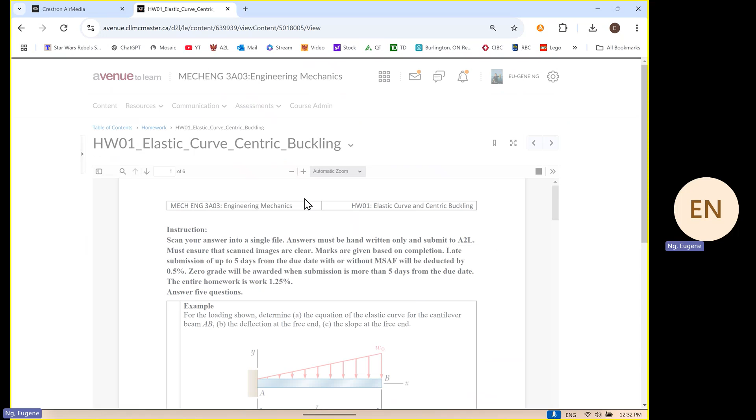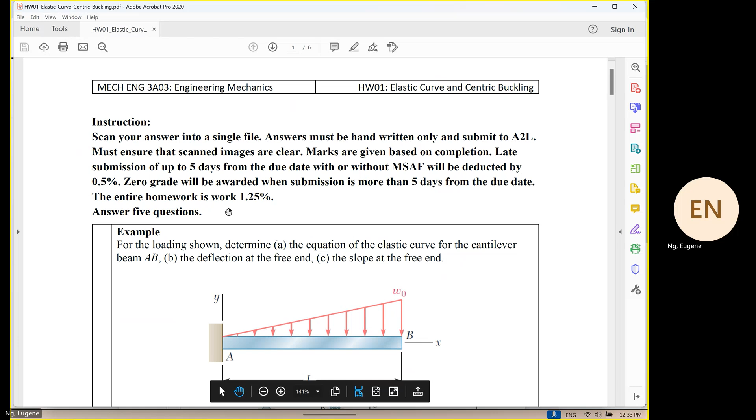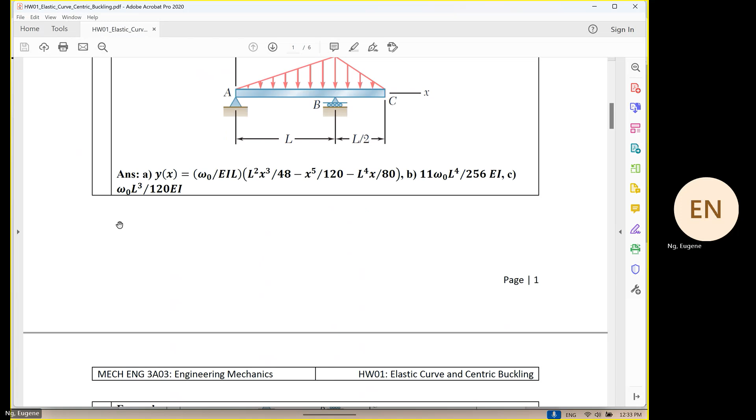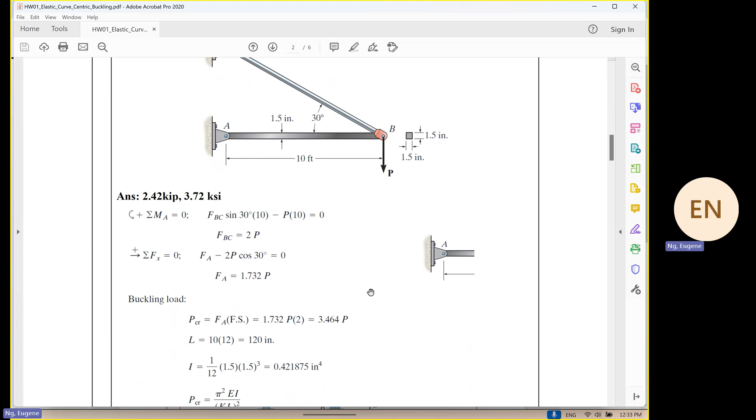So this is your homework that you see. For all my homework, you have to answer 5 questions. This is a bad example over here. Anything that you see a number over here, you have to do. And what I've done this year, over here, this is a different question, but I put it as what? Example. Are we clear? So the example means this is the question, and the solution is also provided already. This you also do, but you don't need to hand it in.

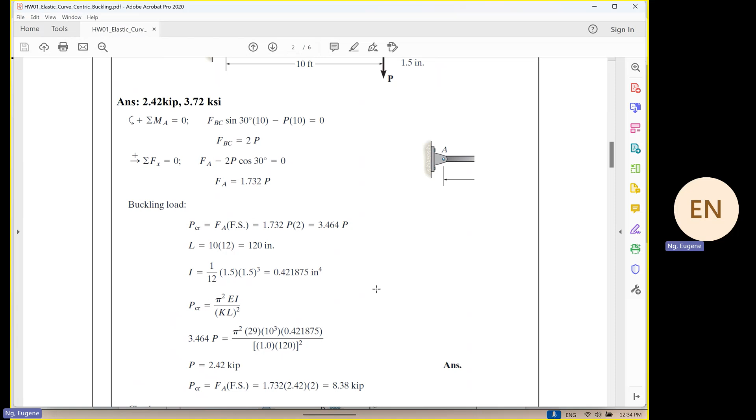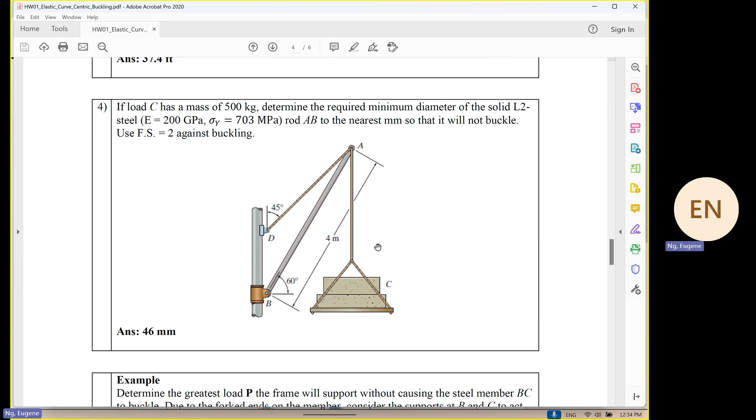What? Confidence. Yeah, I want to give you some confidence. The solution is provided. So for this question, you do it on your own. If you don't hand it in, I'm fine. For the next one, you see question 2, solution not provided, but the final answer is provided. Question number 3, question number 4. Then you see the next question is again what? Example, the solution is provided. But that does not mean that... No.

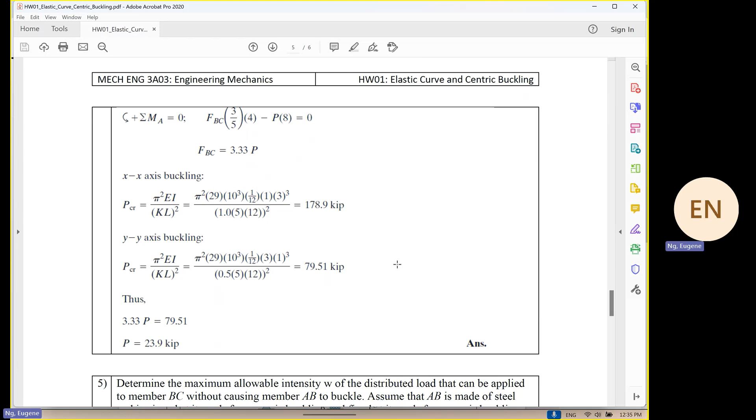These examples can be the question. The only thing is you don't need to work them and hand them in. Are we clear? Because in the last course evaluation that I got, not enough examples. So I'm giving you all more examples now. So only do those questions that have what? That have a number on the side over here. Are we clear? Only do those questions that have a number. More exposure, more questions.

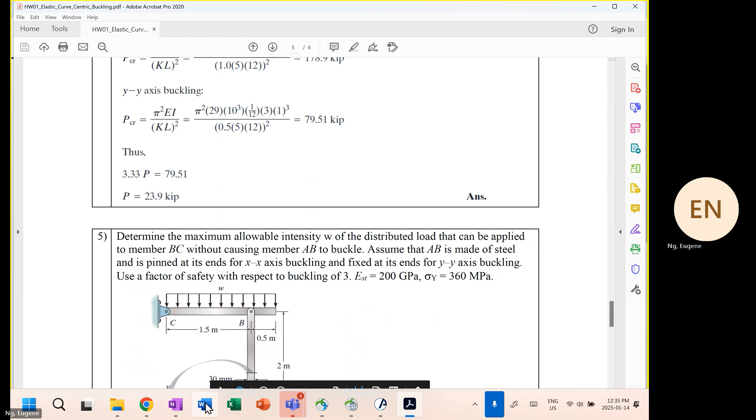The due date. I usually give a week; it is due on January 20th. And you can hand in up to 5 days late, say, on your MSAF. Okay, you're wasting your time on MSAF. You can hand in up to 5 days later, but half the marks will go. Are we clear? Same as 2Q04. Now, 5 questions is not a lot. Am I right or am I wrong? It's not a lot. Try to finish them. Be ahead of time.

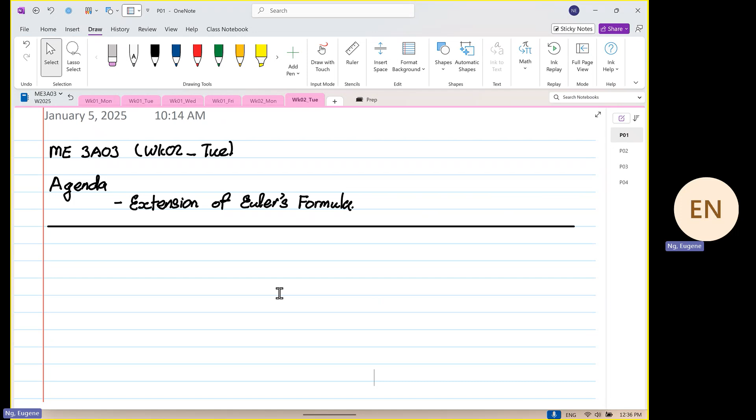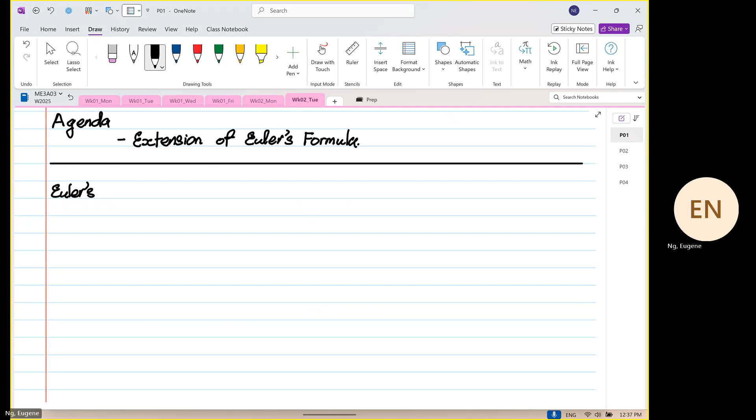All right. Before I go on, please go into week 2. Download the examples that I'm going to do, because all the images and questions are going to be taken from there. So today we are going to focus on the extension of Euler's formula. Based on Euler's formula for buckling, there are 2 formulas that you have seen before.

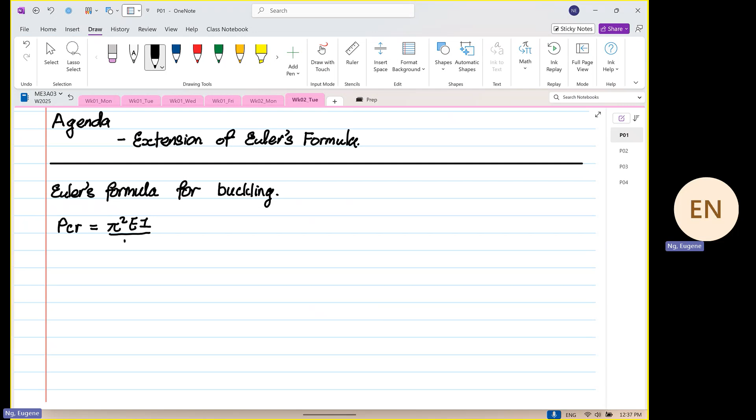One is based on the critical load, which is equal to pi squared EI over L squared. And the other one is based on critical stress, which is the critical load divided by cross-sectional area. This eventually becomes pi squared EI over A L squared. There's an L squared missing on my term over here, I do apologize. And when we write this out, it can also be pi squared E over (L over r) squared. As you already know, L over r is known as the slenderness ratio.

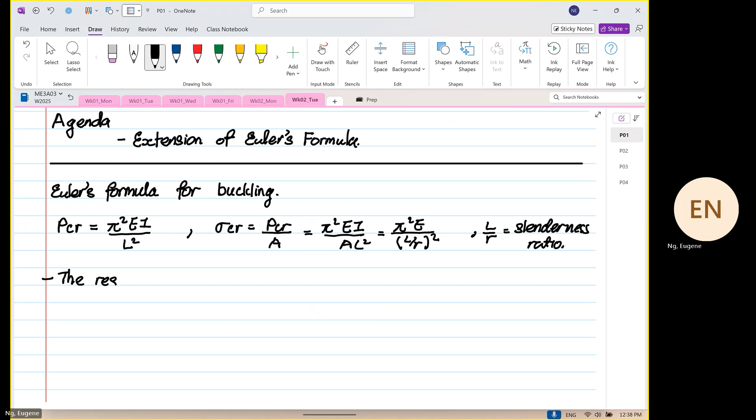Now, also known is that the resistance to buckling is dependent on Young's modulus, as you can see, this is our E. It's dependent on the length, this is our L. It's also dependent on our cross-sectional area or cross-sectional geometry, which will affect both our I and cross-sectional area, and also how the structure is held on its ends.

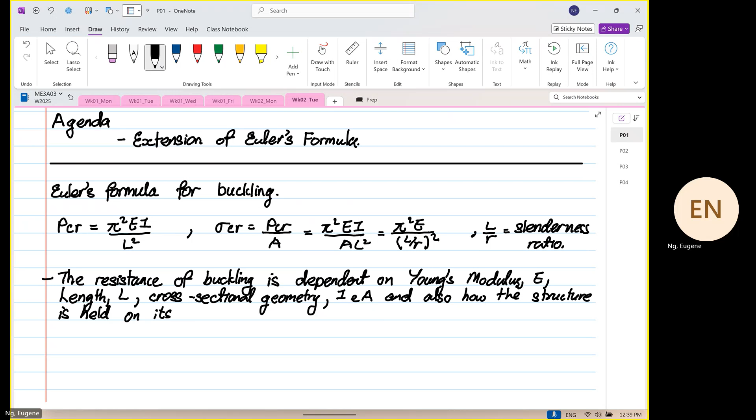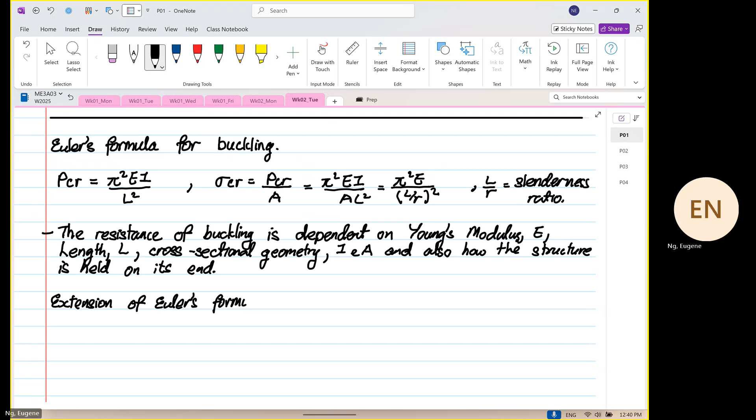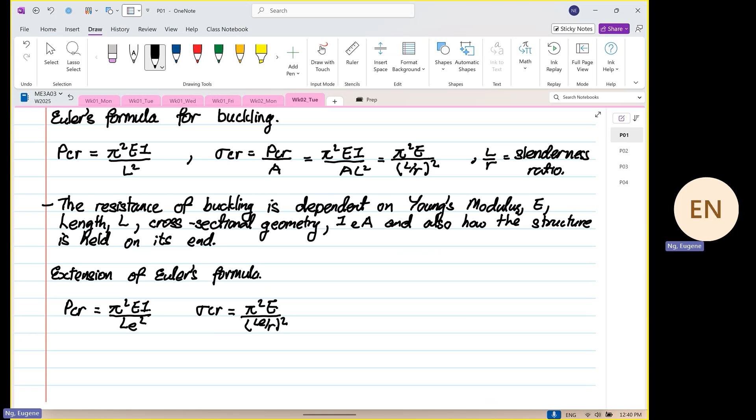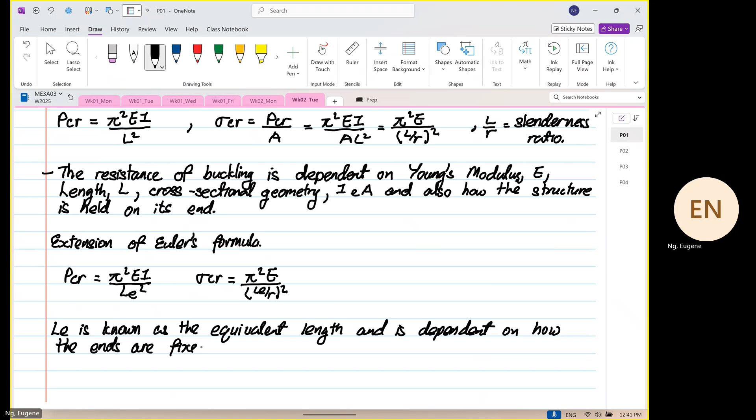So to write this out based on the extension of Euler's formula, you write P_cr is equal to pi squared EI over Le squared, and the stress is equal to pi squared E over (Le over r) squared, where Le is known as the equivalent length, and is dependent on how the ends are fixed or held. If I say fixed, it's pretty contradicting.

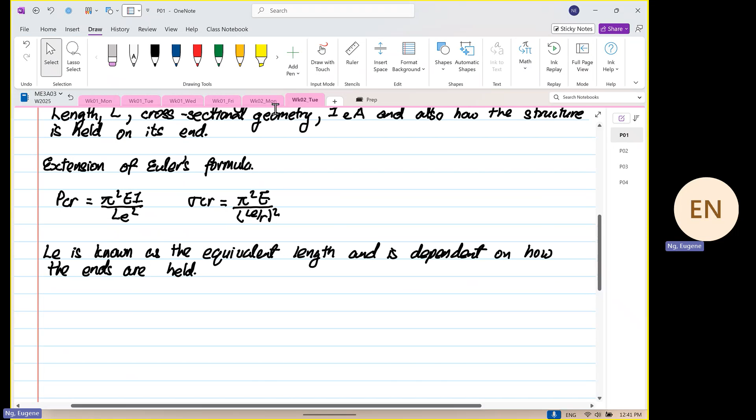So based on yesterday's notes, we have this image, okay? I want you to pick this image out. If you have this image, download this image as soon as possible.

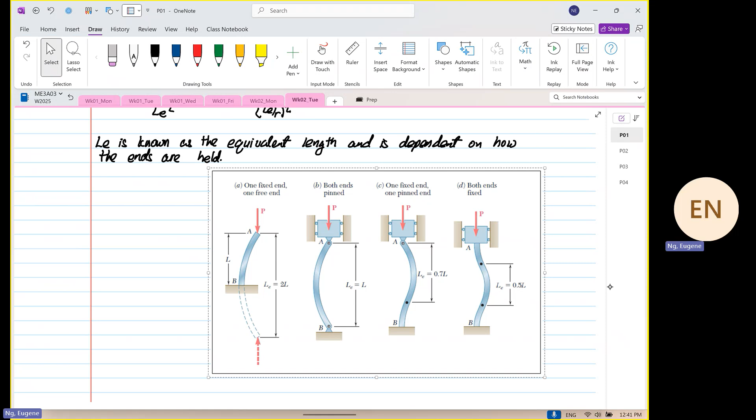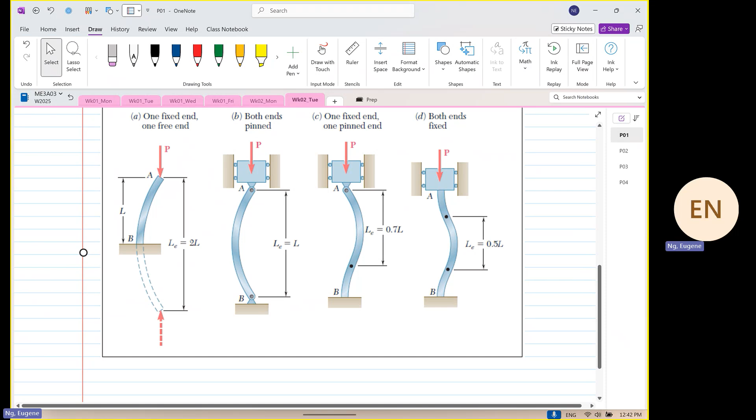Now, these images, initially, when you look at them, it's pretty confusing. Okay? Initially, when I look at them, I find it a bit confusing also, okay? So the most important thing to observe is the deformation pattern. Okay, observe the deformation pattern.

When I look at them, you know, you have this mode, it's like, see nothing. Okay, that was me. Okay, but don't be like me. Okay, I just like, okay, it's a diagram, move on.

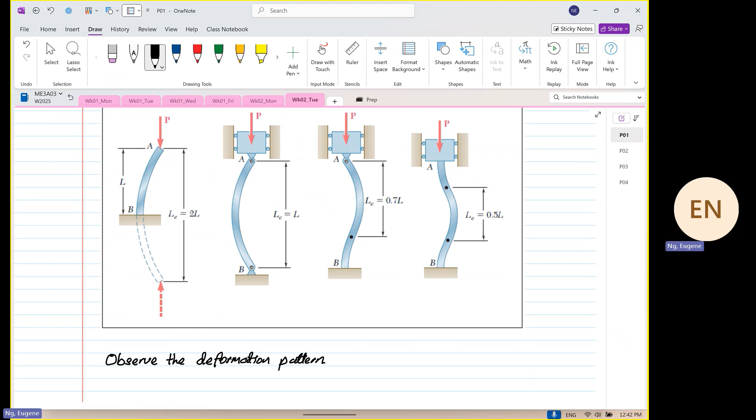Okay, the deformation pattern is as critical over here as anything else. Okay, so the first one is one end is fixed and the other end is free. Okay, so you can see, right, this is how the deformation pattern looks like. So when it's fixed, what you can observe is over here is more like zero bending, then on top here, then it starts to bend. Okay, so this portion over here is like a straight line.

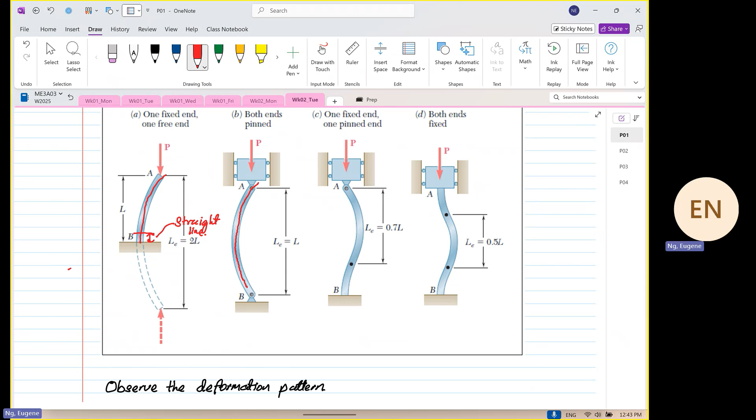Okay, and the next one, both ends are pinned. So let's focus on the deformation. So you can see that theta is not equal to 0. Okay, theta is not equal to 0. So theta is the slope of deflection. Okay, so over here, theta is equal to 0 when it's fixed.

Now the next one is a combination of one end fixed and one end pinned. Okay, so what you observe over here, you have a radius, you have a curvature, you have a theta. But once you come over here, theta is equal to what? 0 again. Over here, theta is not equal to 0. And you look at the deformation pattern again at A when both ends are fixed, and then at point B, right? Over here, the slope is equal to 0. Slope is equal to 0. Okay, so observe the slope. So I want you to make that observation.

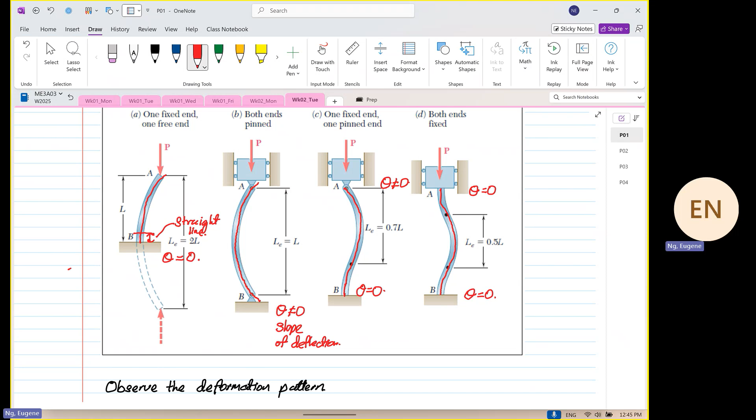Okay. So another thing that I want you to highlight, how to recognize what is what. Okay. So whenever it's fixed, right, M is not equal to 0. The moment is not equal to 0. Okay. So for the first one, the other end is known as free. When it's free, the moment is equal to what? 0. Okay.

The next one in the center, when both ends are pinned. Okay, so for this case, theta is not equal to 0. When that's the case, moment is equal to 0. Over here, moment is also equal to 0. The next one at point A, the slope is not equal to 0. So moment is equal to 0. When theta is equal to 0, moment is not equal to 0. Okay. So the theta and the moment behave like a father and daughter relationship. When I tell my daughter, don't go there, what will she do? She will do it. Okay?

Teaching you guys is easier than teaching my daughter, okay? And some of you will say, Eugene, you deserve it.

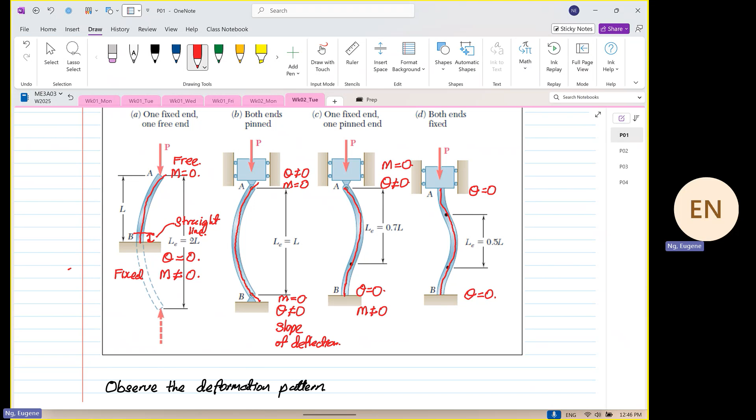Are we clear? Okay, so this is how you now recognize the difference, when is it a free? Okay, when is it a free? Okay, so now I'm going to sketch a green line, which is the centroid. So the green line is my centroid. So you can see the P shift away from the what? Right? So when the P shifts away from the centroid, this is where we call it as what? Free.

The next two cases, as you can see for yourself, okay, the P is aligned to the what? To the centroid. Can you see that? Okay, the P is aligned to the centroid. So the only case where it's free is when the P